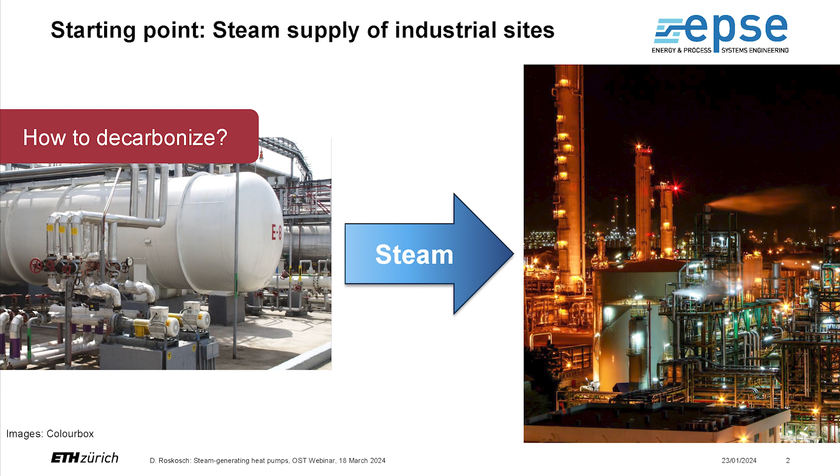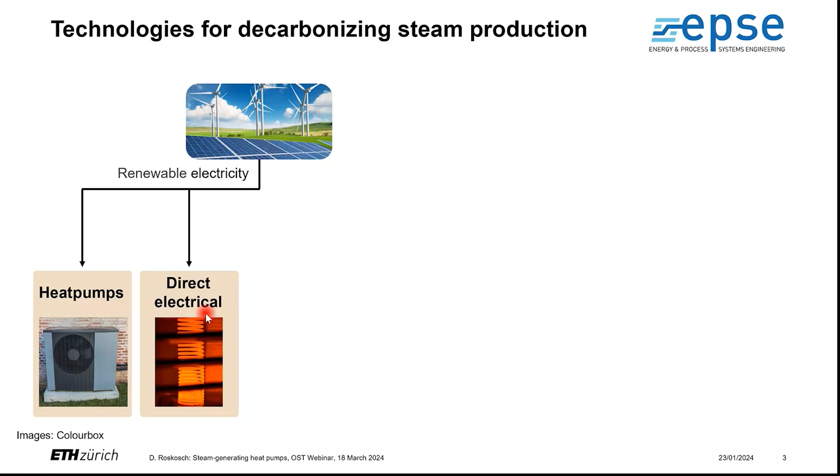When we talk about renewable energy and decarbonization, we usually start with renewable electricity, and starting from electricity, various conversion routes to heat are discussed and available. Maybe mostly discussed is direct heating by using heat pumps and electrical heaters like electrode boilers, and also the route through hydrogen, by direct combustion or combined heat and power plants.

These are also the routes I would like to compare today. I'm sure that you all have a feeling for which is the most efficient route if I would like to transfer electricity to heat.

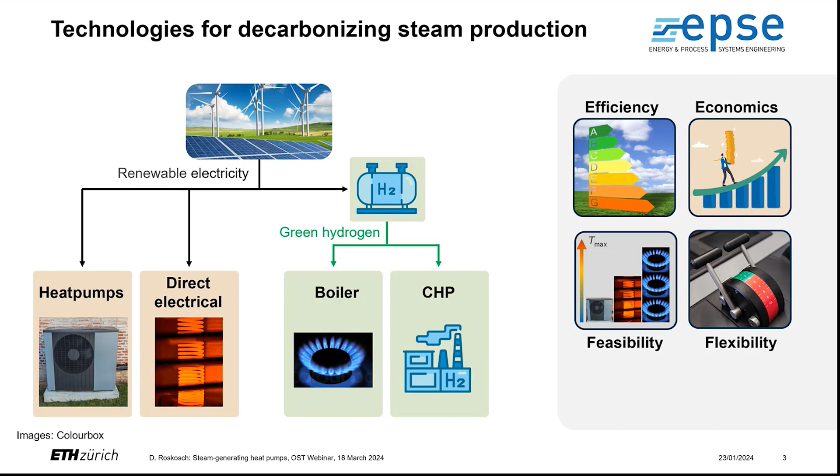But actually it isn't that straightforward, because these technologies have different properties or features beyond exergetic efficiency, like economics and feasibility, for example maximum temperature, and also flexibility. We would like to cover these trade-offs with our study, and we do this by a system analysis.

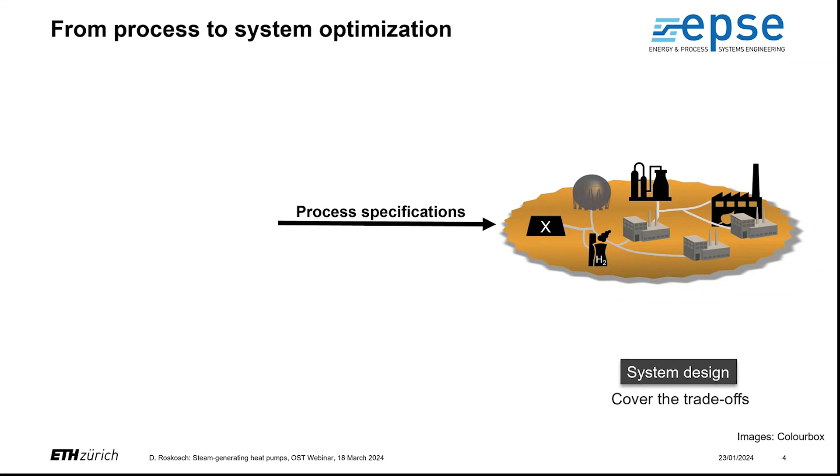What we do is we bring these technologies to the system level and evaluate their performance within the entire energy system. And what we of course need is the specification of the technologies to account for them on the system level. Here a problem pops up, because at least some of these technologies are not market ready, and that means we can't just open a catalog and get the information we need.

We solve this by modeling these technologies. So we take a look into the future and look at how these technologies can perform in future. And that is what you can expect from my talk today.

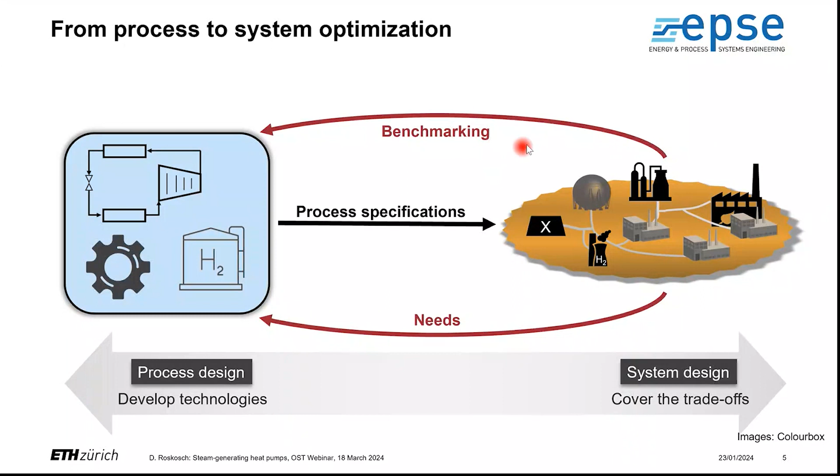We first model the technologies, and I will focus here on the heat pumps for a good reason. Then we go to the system level and evaluate the performance of these technologies.

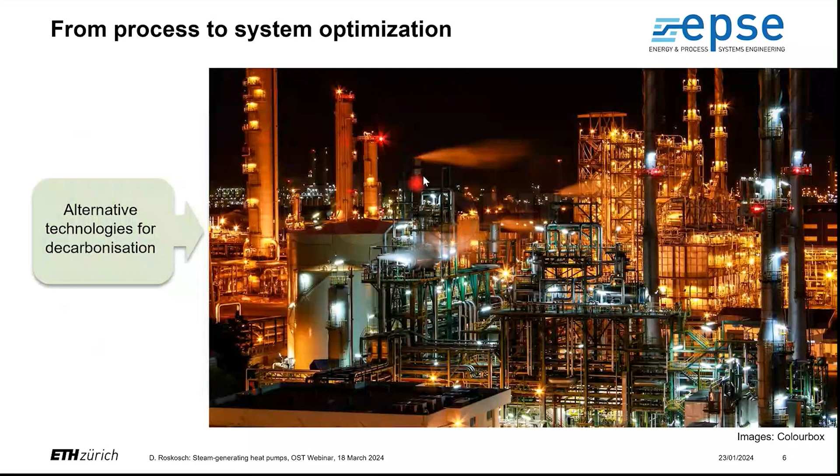Okay, what's our playground? Our playground is a chemical park. And in our world, as engineers, a chemical park usually looks like this. On the right-hand side, we have demands, in that case time-dependent demands of electricity, 6 bar steam, and 31 bar steam.

There is an energy system that currently provides these demands, which is based on natural gas, and it's a large system. It consumes 5.4 terawatt hours per year of natural gas, and just for comparison, Berlin needs 5.5 terawatt hours per year for domestic heating.

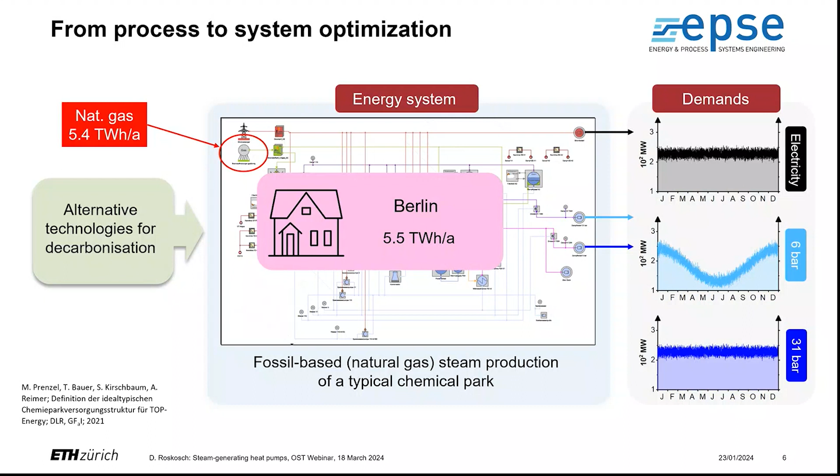So what we now do is we keep the demands here on the right-hand side, but we kick out the fossil-based energy system, and we aim to replace it with a new energy system based on alternative technologies with the potential for decarbonization. We also keep in this study the centralized structure of the energy system, and that means there are no backflows from the chemical park, no waste heat backflows.

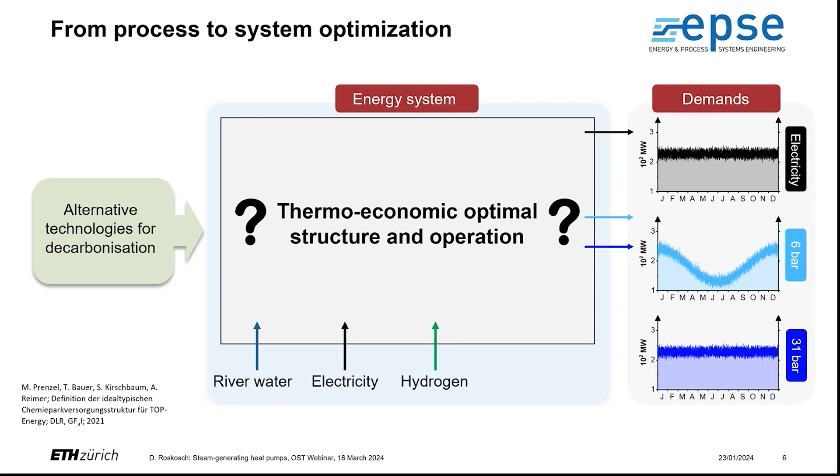The only things available for the energy system are river water, electricity, and hydrogen. Okay, so before we can tackle the energy system, as I said, we must take care of the heat pumps.

We consider different types of steam generating heat pumps under different conditions, like steam pressures and temperature of the river water and so on.

We also screened, for each of these processes and conditions, 457 refrigerants. We do this in thermoeconomic process simulations, where we come from thermodynamics, go to sizing and design of the components, design of the processes, and the processes are then always also optimized regarding the COP. What we then get is a long list of investment costs and COPs and so on for each refrigerant, for each working condition.

And then we discarded some refrigerants, for example due to too high global warming potentials. In our study, we finally consider the process with the best performing refrigerant.

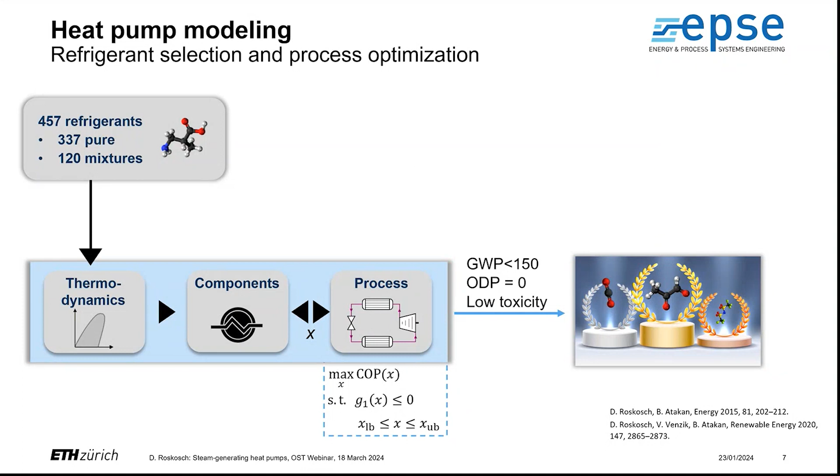Okay, so as I said, we consider various types of steam generating heat pumps. First of all, the direct evaporation heat pump, the basic principle, a four-component cycle as simple as possible. And we consider this in subcritical and transcritical operation.

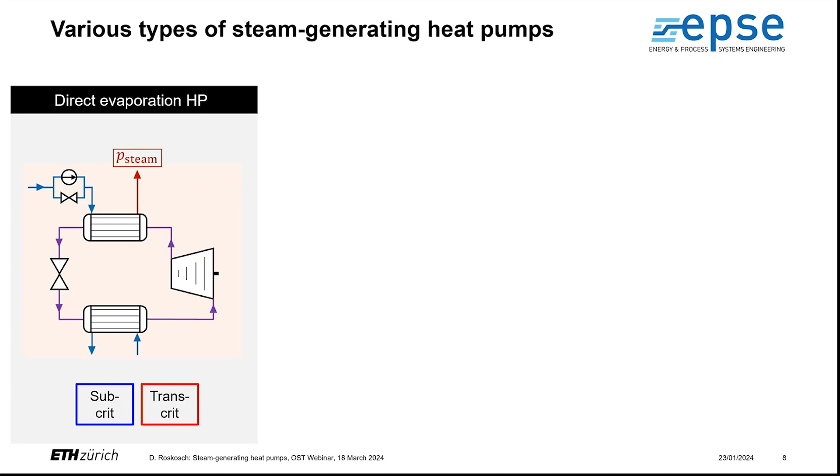Second, we also consider flash evaporation heat pumps, where this standard heat pump cycle first produces hot water, and then in the flash tank steam is produced. We also consider this in subcritical and transcritical operation.

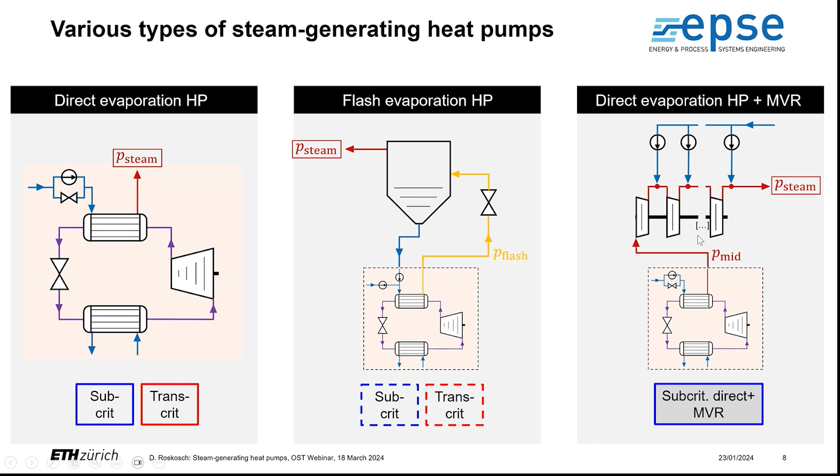And finally, also direct evaporation heat pump in subcritical operation with mechanical vapor recompression. And in the process simulations, the flash pressure and also the mid pressure here are optimization variables.

Okay, so let's come to the results of the heat pumps. As I said, we analyzed the COPs and investment costs over wide ranges of steam pressure, steam production capacities, and also heat source temperatures.

This is all included in the energy study, but here I will exemplarily show some results from these cases. These are the results for 4 steam pressures: 0.2 bar, 1 bar, 6 bar, and 31 bar, which are relevant for the energy system we consider. Exemplarily, the specific investment costs for a 25 megawatt heat pump.

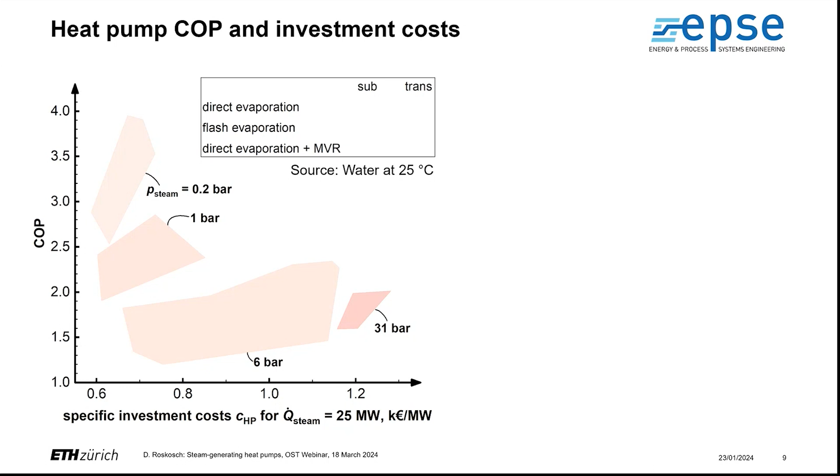So when we start with the subcritical and transcritical heat pump in direct operation, subcritical in blue and transcritical in red, we see that the subcritical cycle outperforms the transcritical cycle. So the condensation better fits the evaporation of water than a supercritical isobar.

And we directly see that these cycles are able to provide steam up to 6 bar. The transcritical goes up to, I think, 18 bar in our study.

But these cycles cannot provide steam directly at 31 bar. If we also consider the flash evaporation heat pumps, here the circles, we see that these heat pumps achieve lower efficiencies in terms of COP and higher investment costs. That's mainly due to the flash tank.

I think that the efficiency is lower is from a thermodynamic point of view somehow clear, because we first produce water at a higher temperature and higher pressure than actually needed, and then throttle it, which causes usually a high exergy loss.

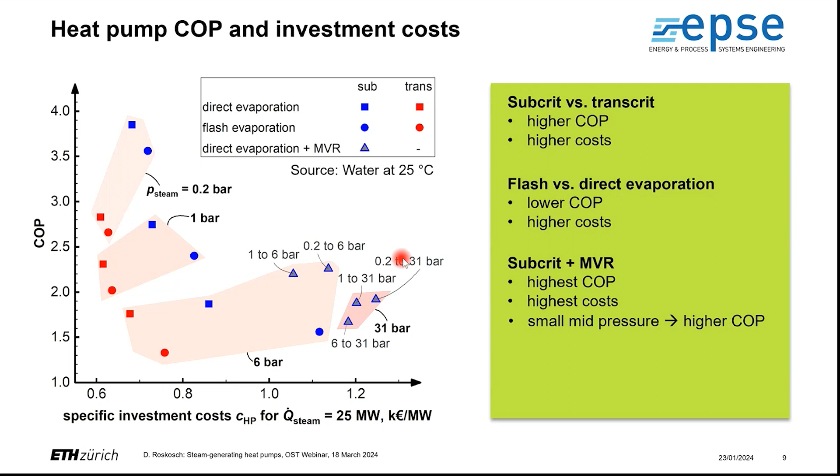So the point is simply the heat pump process itself works much better under conditions where we produce low pressure steam, and we can also find very efficient refrigerants for these lower temperatures.

So what we generally see here in this plot is that there are interesting trade-offs between COP and costs, and that is what we would like to analyze on the system level.

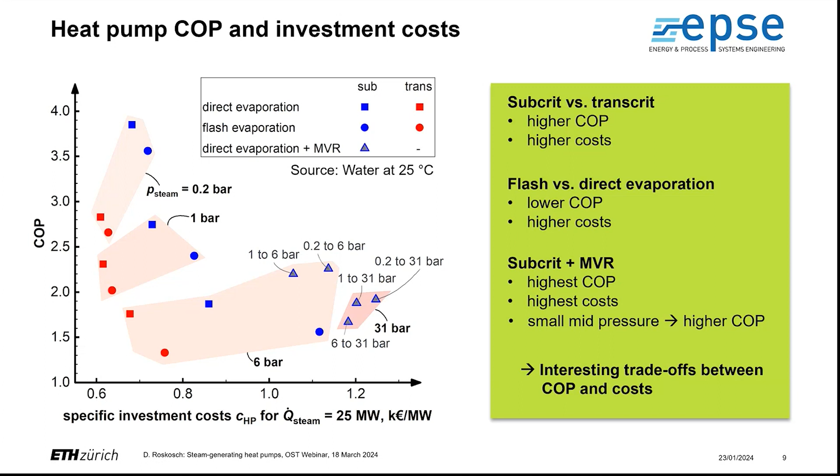Okay, then let's go to the system level. Starting from the demands that we took from the chemical park, we developed a superstructure of the energy system.

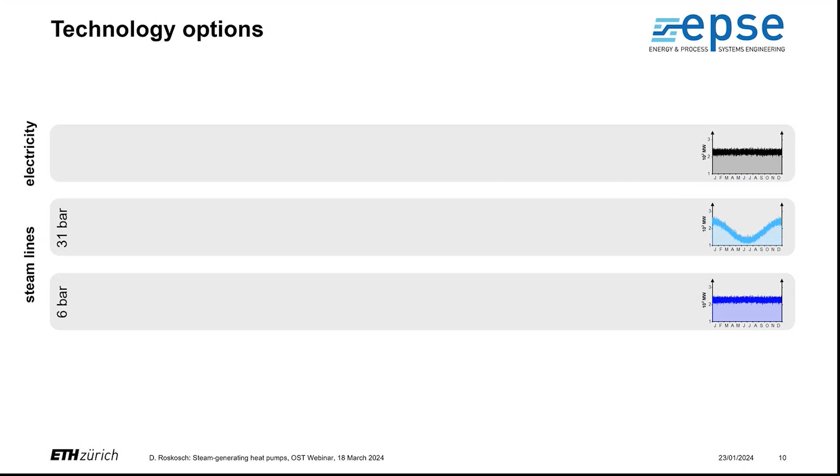And we first have our heat pumps, but we discarded the flash heat pumps because they are more expensive and less efficient. So we do not expect that these come out.

So we have subcritical and transcritical heat pumps on the 6 bar line in direct evaporation, but these processes cannot provide 31 bar steam directly. And we have the combination of subcritical and mechanical vapor recompression.

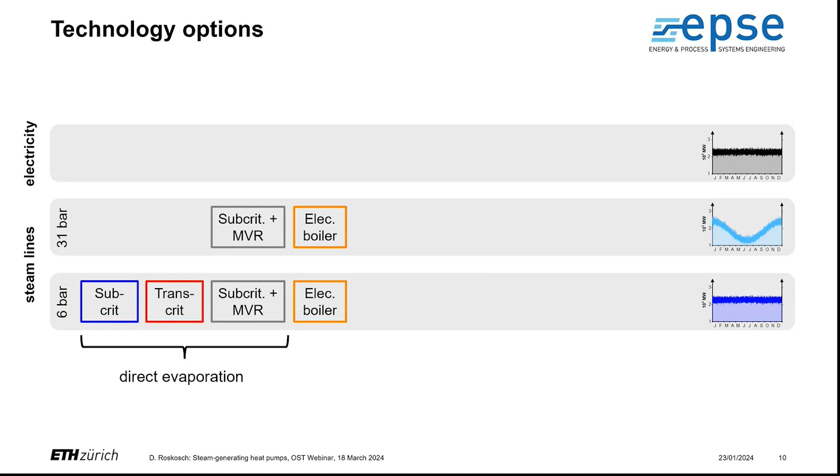And as further electricity-based technologies, we consider electrode boilers. And on the hydrogen side, there are hydrogen boilers, simple boilers, and a hydrogen CHP that incorporates a hydrogen gas turbine and downstream boilers that use the exhaust gas to produce steam.

And the CHP is designed to directly provide steam at 6 bar, 31 bar, and of course also electricity. As steam line connecting technologies, we consider single recompression units, and in the other direction, throttles and also expanders.

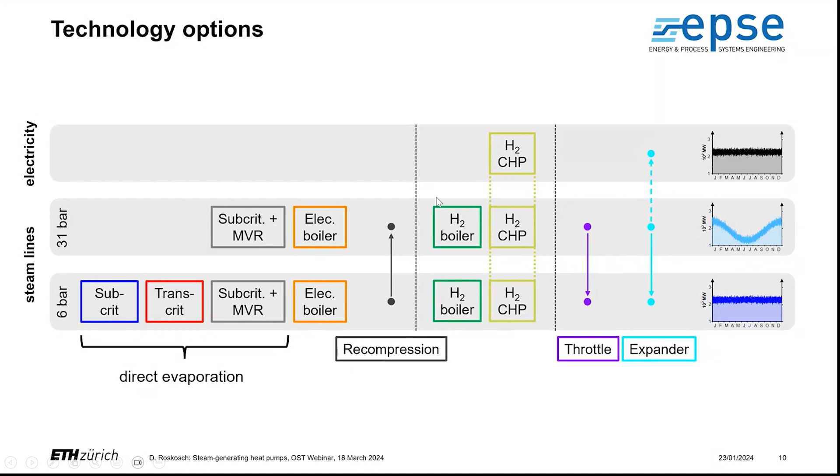And all these components can be built in the energy system optimization. Okay, so it finally ends up in a structural and operational optimization where every technology is characterized by its capacities, efficiency, also part load behavior, investment cost, maintenance cost, and lifetime.

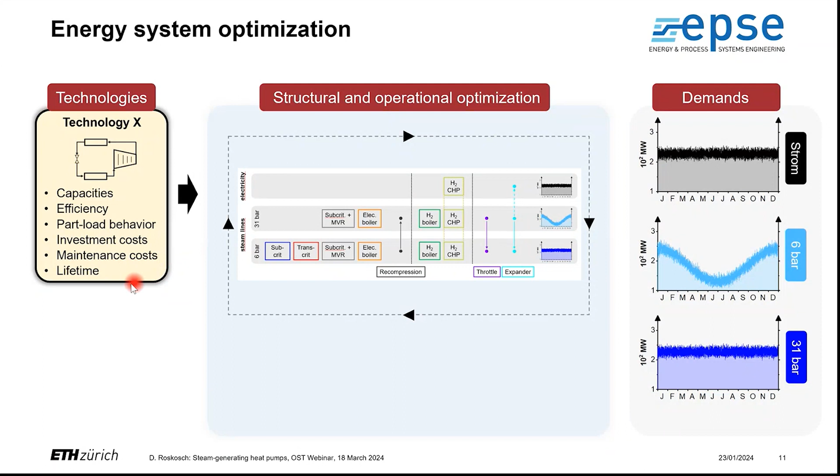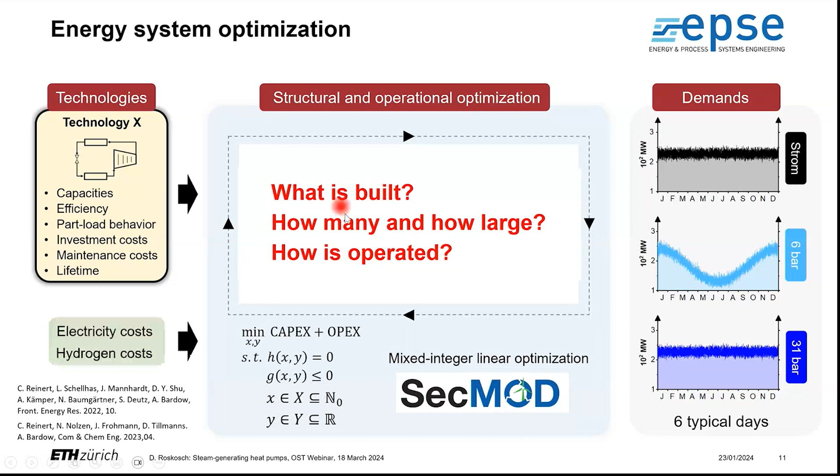And the objective of the optimization is minimizing the total costs while the demands have to be fulfilled. In the end, the optimization answers the question of what is built, how many and how large, and how it is operated. Later we will also vary the electricity cost and the hydrogen costs.

Okay, let's start with the first results for the energy system. We start with the base case. Here we took electricity and hydrogen prices from 2021.

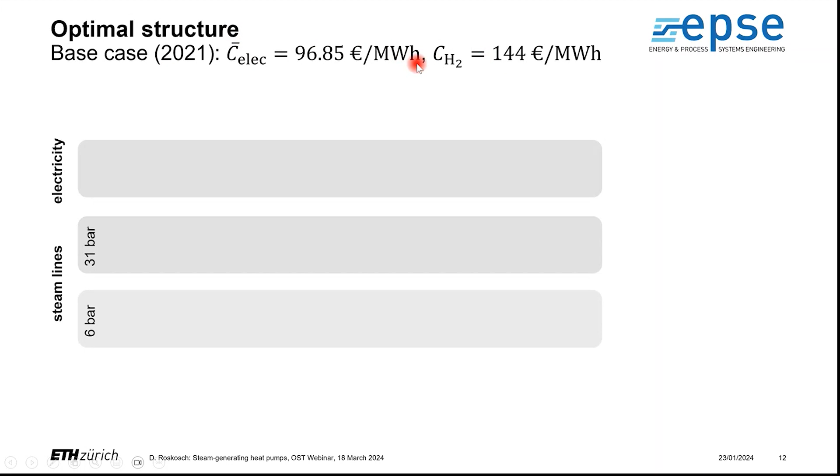And what we see in the result is that the energy system is dominated by large capacities. Here, these are the capacities of highly efficient heat pumps. So mainly the combined cycle is chosen.

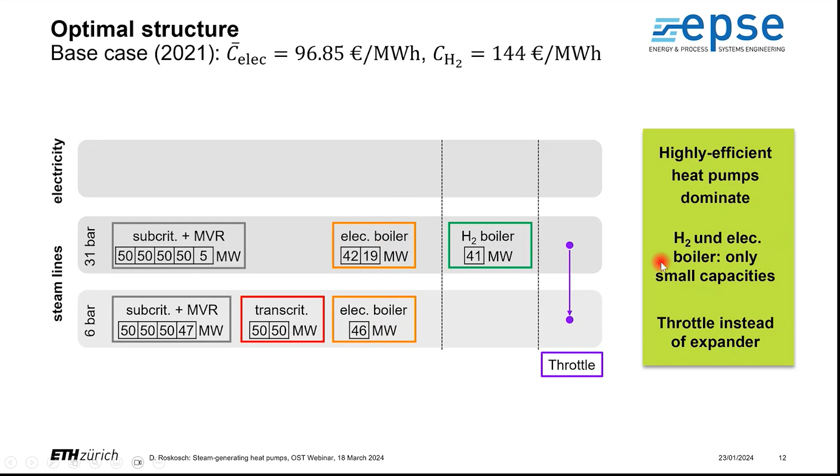It is the most efficient, but also with the highest costs. And then we see a transcritical heat pump which is less efficient but also cheaper. A bit of electric boilers, and a small hydrogen boiler, and a throttle is built instead of an expander.

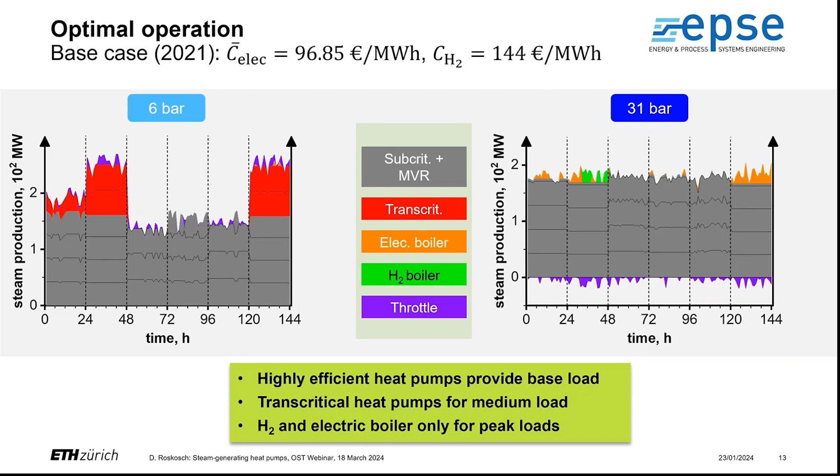So the conclusion for the electricity and hydrogen prices considered in the base case is completely clear: a heat pump dominated energy system yields lowest cost. But the problem is we have to start the transition of these systems today, yet it's uncertain how electricity and hydrogen prices will change in the future. In the end, we have to bet on how the prices will evolve, and we have to do this today.

To solve this uncertainty, we varied electricity and hydrogen prices and derived different cases for the structure of the energy system. First we have the base case, that's the structure you already know, I presented the results, heat pump dominated. Then we consider another case: it's the same structure, but the assumptions are worse, for example for the heat pump COPs are more conservative.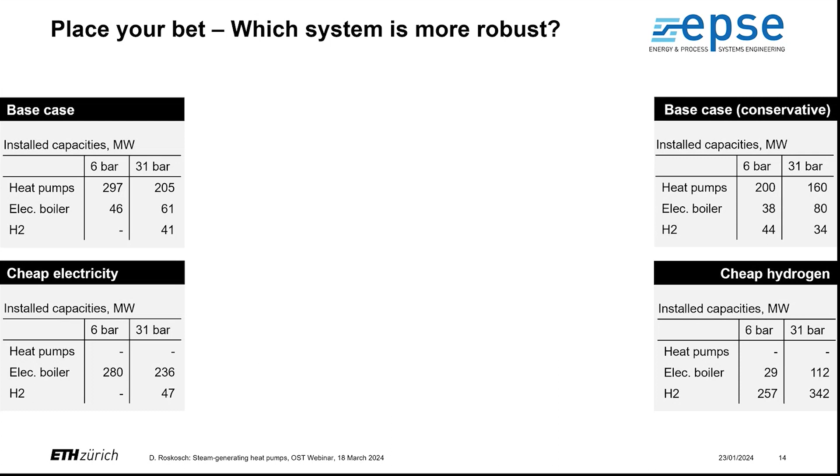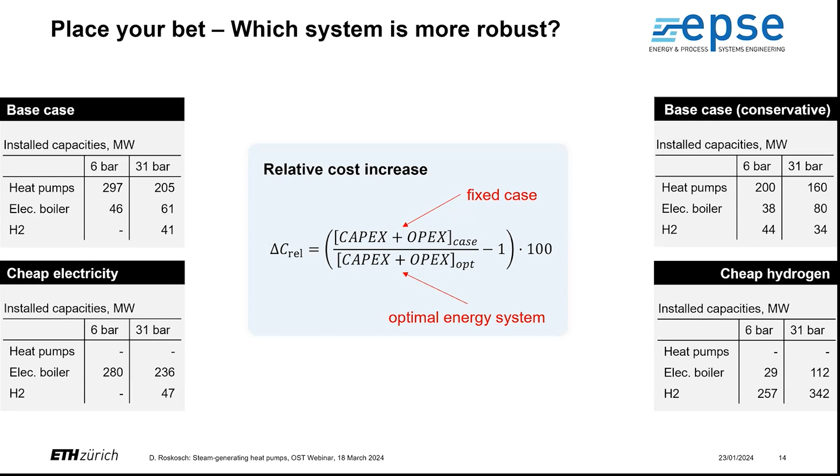Now we fixed the structure of these four energy systems and varied electricity and hydrogen prices. Then we compared the total costs of each case for the respective combination of hydrogen and electricity price, and compared it to an energy system which is optimal for this combination of prices. In the end, we made the decision today for the energy system and compare it to perfect foresight.

And this is what we get. The color code represents, so we have the four cases, and the color code represents the relative cost increase over lifetime. These are forecasts for electricity and hydrogen prices in 2030, 2040, and 2050. We directly see that we are well positioned with the heat pump dominated case here. Nearly everything is green, only minor cost increases are expected.

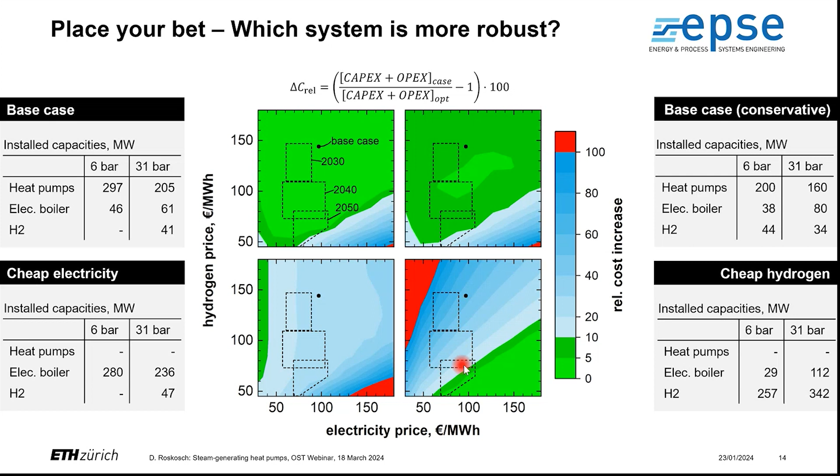However, for the electrode boiler system, larger cost increases are expected. If we had bet on these systems, we would have to cope with larger cost increase, because electricity will probably never be cheap enough so that an electrode boiler dominated system will be cost effective. For most price forecasts, a hydrogen dominated system results in significantly increased cost. Only if really the lower price limit in 2050 can be reached, a hydrogen-based system could be cost effective.

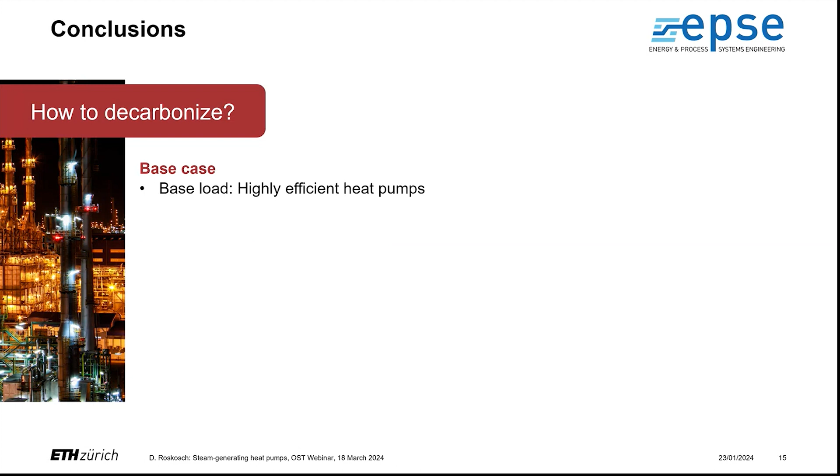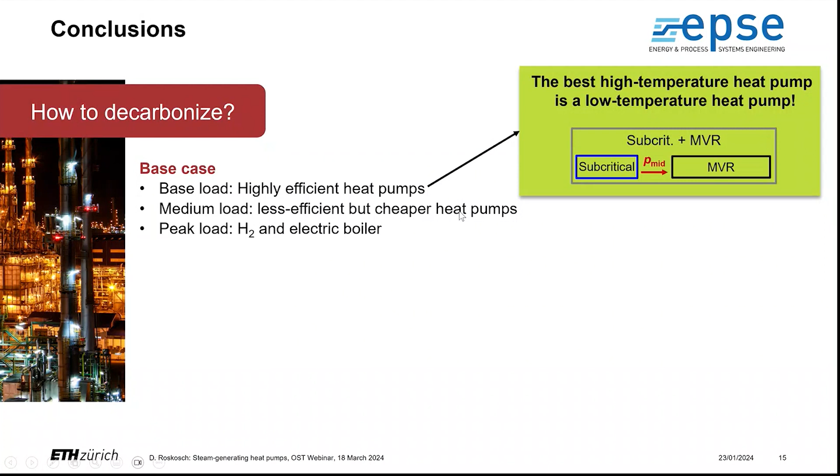Okay, so that was our starting point, how to decarbonize steam supply at industrial sites. We saw for the base case that highly efficient heat pumps are favored, and they may cost something, that's the good news for the manufacturers. We found that actually the best high temperature heat pump is the low temperature heat pump, because it's a combination of a low pressure steam producing subcritical heat pump and mechanical vapor recompression. But there's also a need for less efficient and cheaper heat pumps to cover medium load. Boilers, and in particular hydrogen boilers, are exclusively used to cover peak loads.

Then we analyzed which technologies we should bet on today to be well positioned in the future, even when electricity and hydrogen prices change. We clearly saw that a heat pump dominated energy system is most robust, at least until 2050. So I would bet on heat pumps.